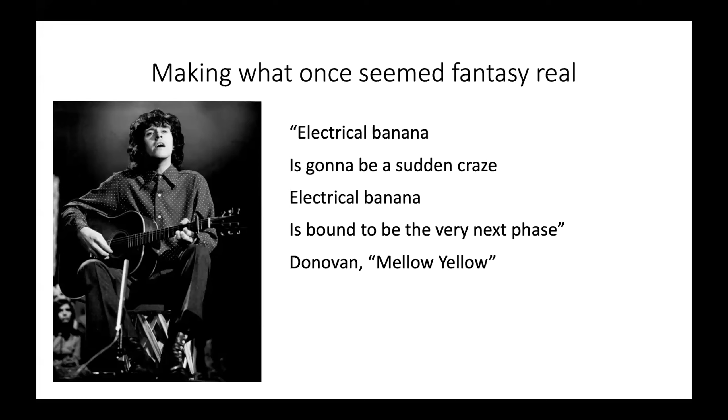However, going to 2021, it does look like we are indeed on our way to having electric aircraft being the very next phase. Much as we've seen with EVs—and by the way, when I say EVs, I mean electric ground transportation vehicles—we're seeing a lot that electric vehicles are going to revolutionize and help us transition to a cleaner economy from ground transportation.

There's a lot of attention also being paid to electric aircraft. In particular, air transportation is getting a lot of attention for its carbon footprint. As of 2018, it was estimated that air transportation made up a total of 2.4% of all global emissions, directly contributed. And the estimate is that if the air transportation sector continued its growth, this could triple by 2050. So with the focus on how we're going to clean up the air transportation sector, electric aircraft are getting much attention as a good short-term step towards cleaning up this sector of our economy.

I'm one of the principals of Aerial Innovation. We're a strategy consulting firm based here in Silicon Valley. We provide strategic advisory services to large enterprises, mostly in Japan, focused on advanced air mobility, or new air mobility—some people call it UAM. There's a little distinction in those terms, but we'll gloss over that for now.

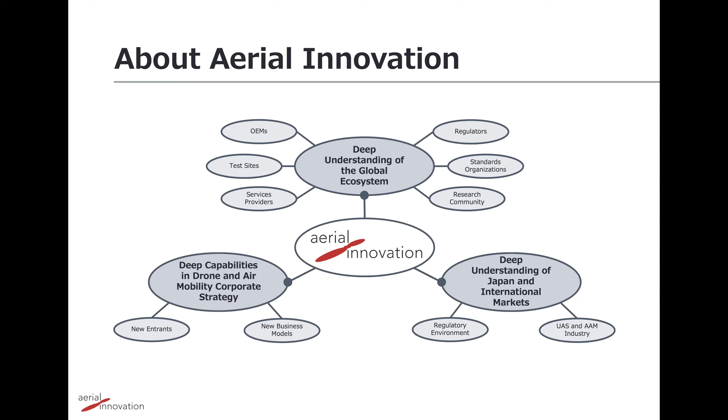We also work in the commercial drone space, or commercial UAS. So we typically advise companies that are not traditionally in aviation on how they can provide value in this new wave of innovation coming in new aviation, and how our clients can build enterprise scale businesses. Our principals have both been doing analysis and advisory in the technology sector for several decades.

Based on a few decades in the technology sector, we see new air mobility as the intersection of technologies that have been maturing for some time, but it's exciting to see them applied to a new sector. So I'll divide my introductory remarks into three categories: first, when will the future get here? A little about the ground infrastructure for electric aircraft, and then the business models that electric aircraft enable. So what are we talking about here?

To start off, electric aircraft are coming—there's no question about it. The future looks something like this illustration that I shamelessly borrowed from NASA. Just to set the stage, advanced air mobility, or AAM, covers everything that you see here.

In addition to small package and cargo delivery, which is envisioned to be done by unmanned aircraft—what some people call drones—and we're not really going to talk about that today, there are manned electric vertical takeoff and landing aircraft, or eVTOL aircraft. These are aircraft with pilots carrying passengers within cities, called UAM, or urban air mobility. You can think of these like helicopters, but with some important improvements.

And then there are also eCTOL, electric conventional takeoff and landing aircraft—aircraft that take off and land at airports, envisioned for transport between cities. In addition to what you don't see here, not part of the AAM vision, is work proceeding on electrification of larger aircraft, like the jet aircraft we're all familiar with to fly to Tokyo, for example. These are not typically included in the AAM vision, but it's an important parallel area.

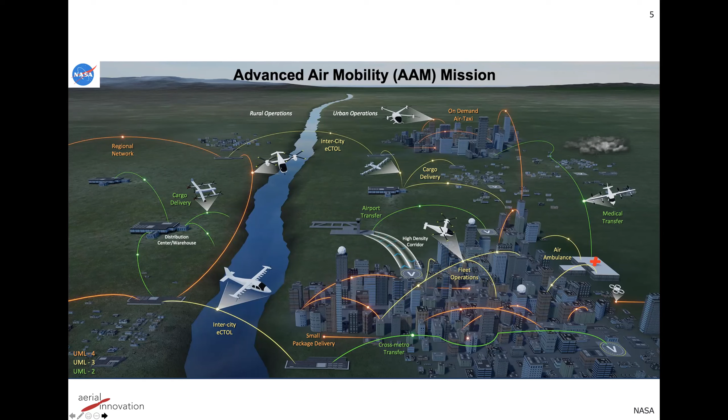Everything I've just mentioned is a vision that focuses on electric aircraft. So that's the future I'm talking about—so when does it get here? When can we have our future? The answer is: very soon, and also not for a while.

The very soon part is these advanced air mobility eVTOL aircraft in this first segment, 2 to 5 seat battery electric aircraft. The first of these are probably going to be certified by the FAA in 2 to 3 years from now—some are in certification right now. Commercial service we can probably expect to see in 2024 or 2025, with companies like Joby, Archer, Beta, Wisk, and others. There's also work going on to certify small propeller aircraft, 5 to 19 seat aircraft.

Some of them are retrofits of existing airframes. Some of them are all new aircraft. The retrofits include companies like magniX and Ampaire. The new designs include companies like Eviation, they have an aircraft called the Alice. Ampaire is also in there, Bye Aerospace, Magnus.

And then finally, here's a third category that is hydrogen fuel cells to power motors, this is a retrofit to existing regional jets. Here I'm referring specifically to a company called Universal Hydrogen, which is working on this kind of a concept. Super interesting stuff that they're doing.

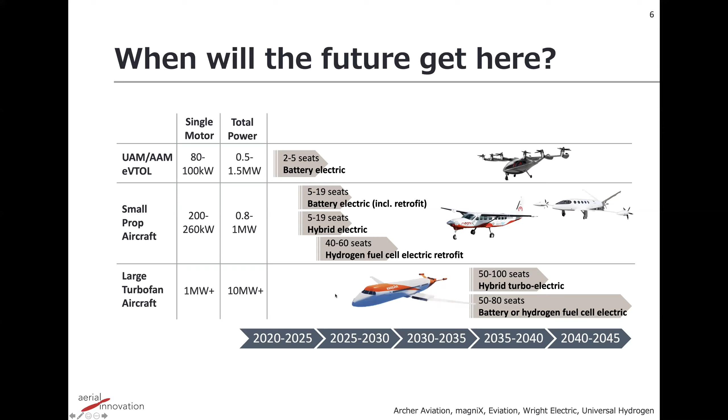In the 2040s is a time frame that we hear a lot. And the reason for that is, when you go from a couple hundred kilowatt sized electric machine or motor to a megawatt plus, and then the total power on the aircraft is 10 megawatts plus, 25 megawatts in some cases, you're talking about a big jump in the development that has to happen to get us from the left side of this all the way over to the 2035, 2040 timeframe.

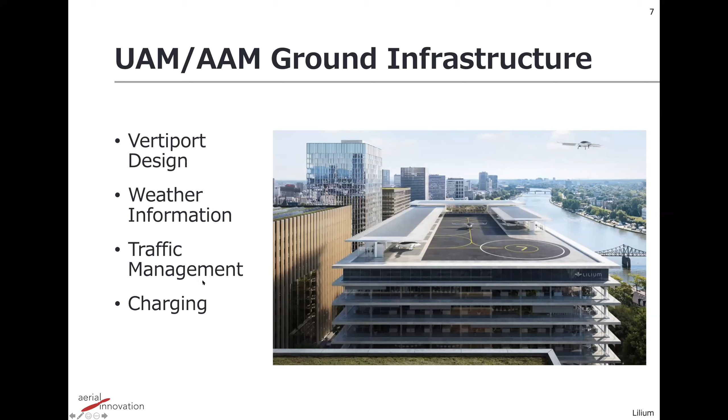Okay, so I'm not going to focus too much on the aircraft themselves. We have some really fantastic experts on the aircraft on our panel today. I'm going to talk more about the ground infrastructure. There are a few aspects that present challenges and, of course, some business opportunities for electric aviation: vertiport design, weather information, traffic management, charging. I'll hit each of these in turn.

So vertiport design. Can't we just land and take off with these new aircraft from existing heliports? The answer is yes, maybe for some, but probably not at scale. If we unpack that a little bit, existing heliports are designed for one basic configuration, the single rotor helicopter. The eVTOL aircraft, first of all, they have wings, many of them, so that they can use lift when they're in their cruise phase of flight and be much more power efficient.

Well, the eVTOL aircraft may need to minimize their time in hover. And so they may want to make a much more abrupt approach, not a right angle, but closer to a right angle in their approach to the heliport, or to what will come to be called vertiports.

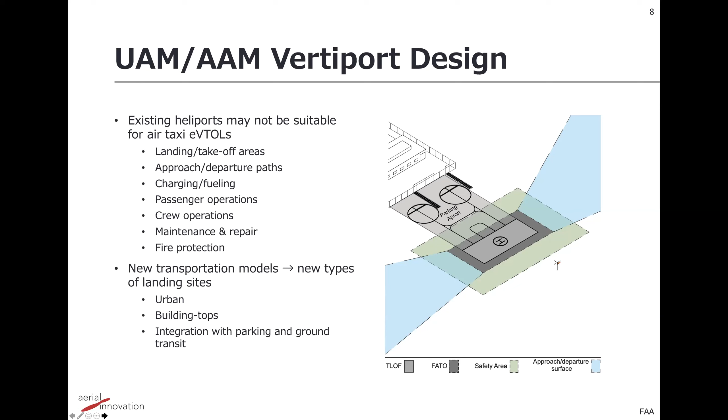So another area of ground infrastructure is weather information. Right now, today, we don't have really good sensing down at what weather people call the planetary boundary layer, so the under 1,000 feet that surrounds the Earth. Because we don't have a dense network of sensors, we can make educated guesses about what's going to be happening with the wind at a particular spot at a particular time, but if we don't have a dense sensing network, it's not very precise.

Smaller aircraft are more susceptible to winds, especially think about urban canyons, right? You've got small aircraft landing in urban areas, that urban wind canyon is going to be a big deal. And it's not only a safety issue, but there's also operational efficiency. If operators have better weather information, they can make better decisions about routing their aircraft, changing the routes at certain times of the day, changing their operations for the day.

But we're seeing some relief here. Some help is on the way.

There are new aviation weather paradigms emerging. New sensors that are not the typical aviation, extremely expensive, very finicky aviation weather sensors, but instead are something closer to an IoT sensor, or maybe something in between. So wind LiDAR is an example, 3D visualization of wind. And then using the data techniques that we use in other domains, applying statistical methods to the data, and being able to still rely on that data.

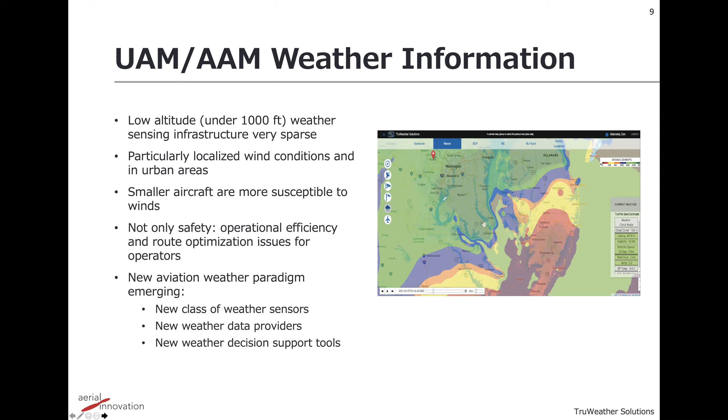The next area is traffic management. So today air traffic management is pilots talking to air traffic controllers, exchanging information and maintaining safe separation between aircraft by voice. That's probably not going to work, there just aren't enough air traffic controllers for thousands and thousands of vehicles in city centers. So AAM is envisioned to fly mostly in uncontrolled airspace, so it doesn't require air traffic control.

That's under typically about 1,500 feet. And then the aircraft organize themselves in corridors, or what's being called now an operating environment. The operators of the aircraft, think like the airlines, can share flight routes between themselves within the corridors, share information programmatically with automated systems, and maintain separation between the aircraft that way.

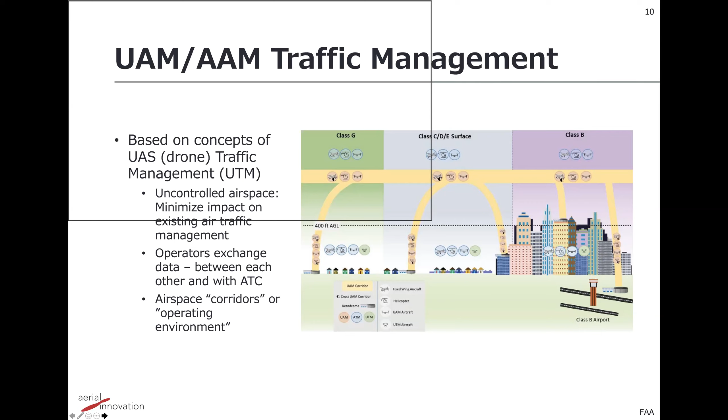This comes from a concept called UTM, or UAS traffic management. UAS means drones. It's developed at NASA and is being widely embraced around the world. This will eventually make its way into both UAM, urban air mobility, as well as sort of all air traffic control at some point.

And then the last thing on ground infrastructure is charging. There are going to be huge impacts on the electrical grid, not only the loads, but also fast charging. And the equipment itself—if you've ever been to a Tesla supercharger, there's a little building you may or may not have noticed that houses all of the conversion equipment. The equivalent of that is going to have to go on the vertiport someplace, up on top of a building. That's a challenge that needs to be solved.

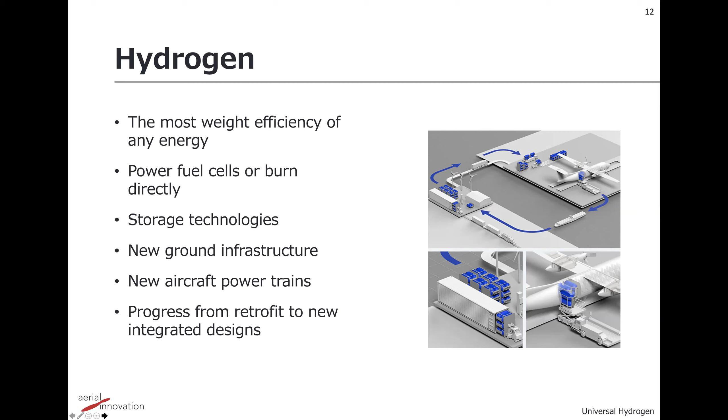I'll also mention hydrogen. Hydrogen is an excellent energy source. There are some technology challenges, right—storage technologies, ground infrastructure. I mentioned earlier a company called Universal Hydrogen. This is their concept for kind of creating Nespresso pods for aircraft with hydrogen. It's a very clever idea, and I encourage you to look into that more.

So these electric aircraft make some new business models possible. They don't need a runway. They're kind of like a helicopter, but they're fast, they're quiet, and they're expected to have much lower operating costs than conventional helicopters. So you can combine these with some other innovations we've seen recently and get powerful demand aggregation, bringing lots of riders together to ride on these vehicles.

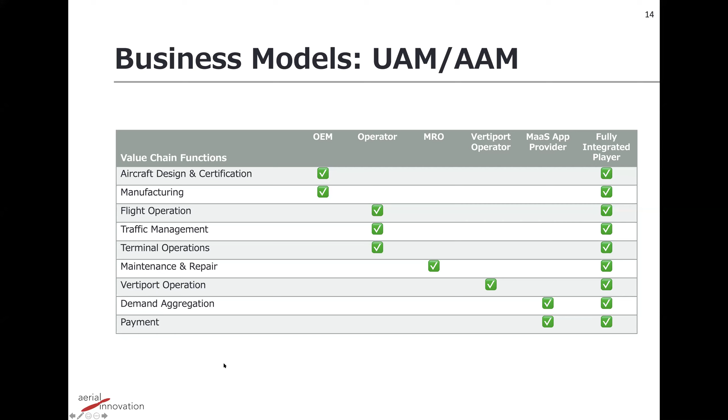Another opportunity that emerges with electric aircraft is different scenarios for business models in aviation. Right now in aviation, if you look at these rows as the value chain, a lot of it's broken up between different parties. This is an oversimplification, but new players like Joby and Lilium and others see opportunities to vertically integrate, to capture efficiencies like lower maintenance and operating costs for themselves. That's what I think we usually call disruption.

And that's the slide that image is supposed to appear on, in the orientation it's supposed to appear.

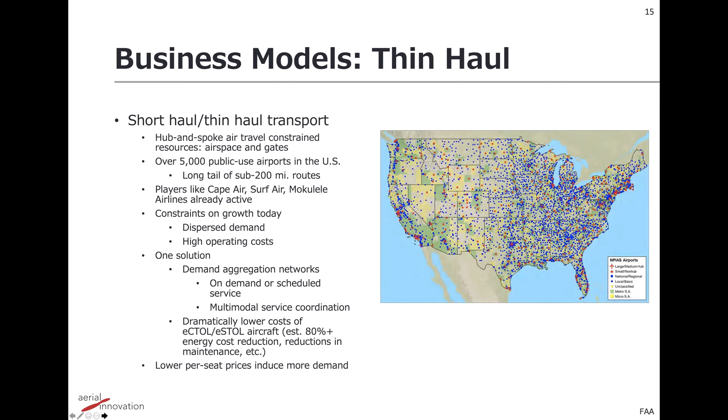To get away from AAM a little bit, just one last comment on something called thin haul or short haul thin haul, using conventional takeoff and landing aircraft, so electric fixed wing aircraft using runways, applying some of the innovations we've seen in urban air mobility or advanced air mobility to those aircraft. This creates an opportunity to use smaller existing airports. For example, here in the Bay Area, San Carlos Airport has providers in this space today, although not using electric aircraft quite yet. You can book a seat from San Carlos to, say, Reno or Tahoe. The original research on this kind of thin haul transport came out of the same NASA research project that eventually spawned UAM, the urban air mobility we're seeing today. Some of the players here are folks like Cape Air and Surf Air, and we can expect to see more of this as electrification of these aircraft makes their business case even better. So that's a quick overview.

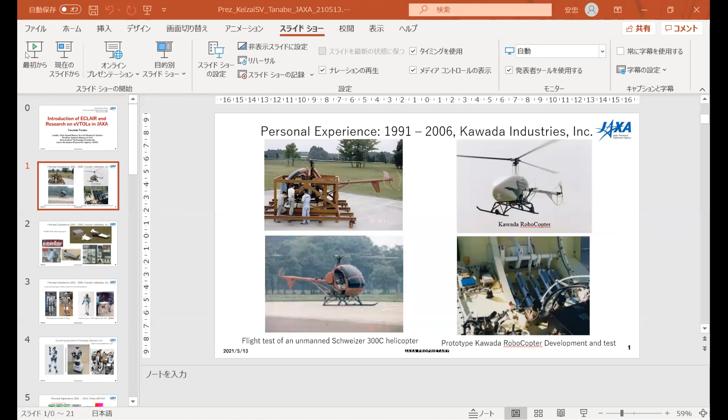I'm Yasutada Tanabe, I'm working for JAXA. I want to start with some background talk about myself and my research on eVTOLs, and I want to make an introduction of ECLAIR, a consortium in JAXA.

My personal experience: before I joined JAXA 15 years ago, I was working for Kawada Industries for another 15 years. During my stay at Kawada Industries, I was engaged in developing the unmanned helicopter. We converted the manned helicopter Schweizer 300C into an unmanned version and flew it unmanned. I think in that era it was very pioneering work. Finally, this work was referenced by the VTUAV by the US Navy, which right now converts much bigger helicopters into unmanned versions for observation platforms. We also developed an unmanned version based on the Schweizer 300A.

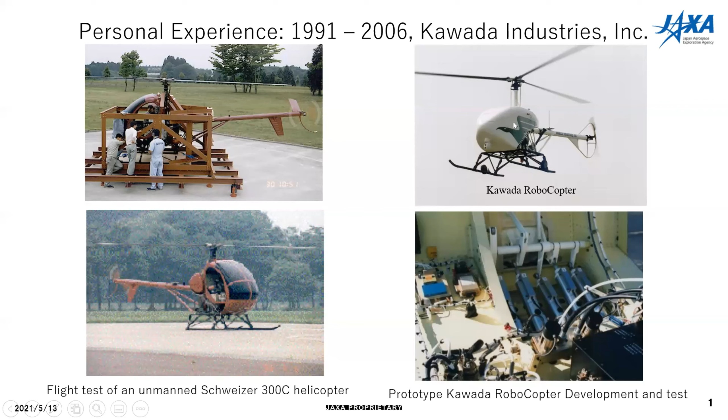We developed the actuators and flight controls, and autonomously flew this aircraft. I also engaged in development of an unmanned small miniature air vehicle. It's fixed wing, but we fly it automatically. This is a project together with Hitachi, the Hitachi Kawada micro air vehicle. Finally, it was used by the Japanese defense, the SAT UAV used it. The production version was 5 kilograms and carried an infrared camera.

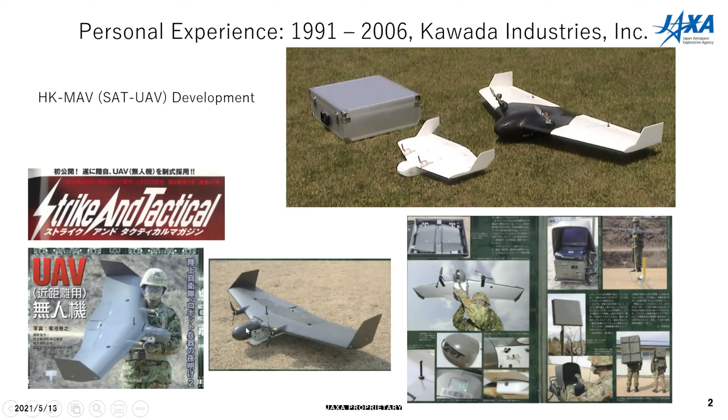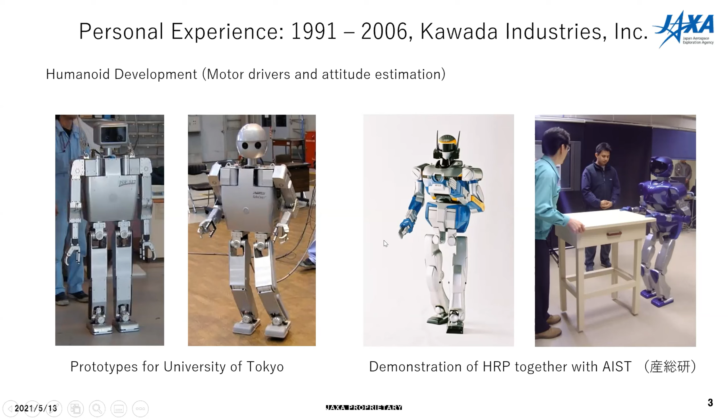I also engaged in some motor driver and attitude estimation work for humanoid robots. First we made prototypes for the University of Tokyo of this kind, and then we got engaged in a national project, the HRP project, humanoid robot project, together with AIST, Sansoken. This robot is designed to work together with humans. We made a lot of demonstrations for that, and finally Kawada Industries set up Kawada Robotics. If you're interested, you can check their website. Right now they're selling a two-hand robot that can stand on the production line and use two hands to assemble very complicated products. Here the previous premier Abe was visiting this factory with this NEXTAGE robot.

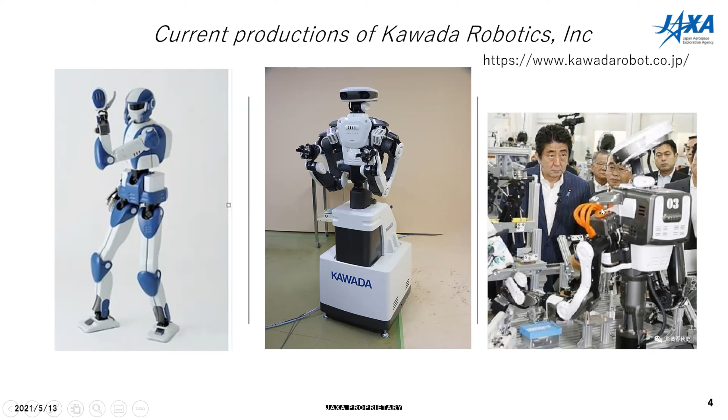When I joined JAXA in 2006, my main work is shown in this slide. Firstly, my major work is actually doing analysis for rotary wings. We can handle very complicated helicopter shapes using very sophisticated numerical methods, and analyze the elastic deformation and vibrations of the blade together with the aerodynamics. Finally, we can predict the noise at any place.

Also, right now my major work is developing a high-speed rotorcraft. This one is a compound helicopter. During the flight, we use propellers for propulsion, so the helicopter can keep level in attitude and has very low drag. Our goal is to achieve twice the speed of the conventional helicopter. Also, using some government funds, I've engaged in developing some variable pitch controlled drones.

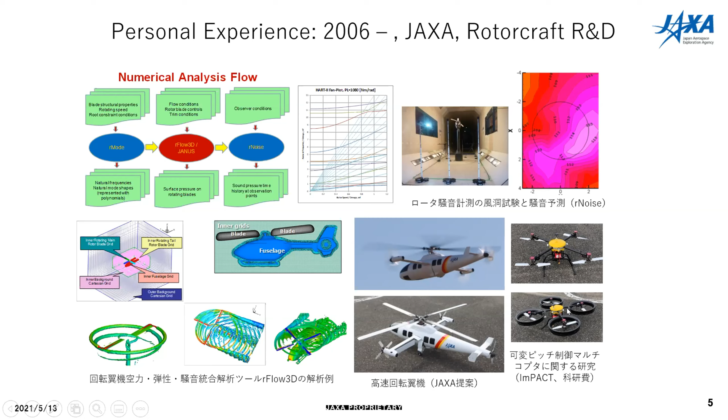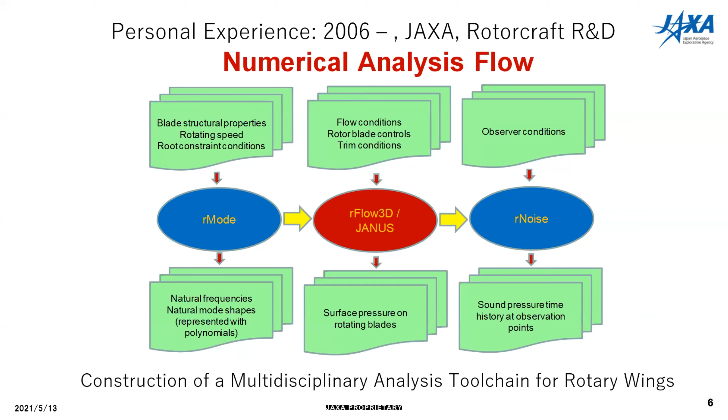And this is some detailed show of the analysis flows. We call it the rFlow3D analysis toolchain. Right now, there are over 10 universities who have interest in the rotorcraft research using our software. And also we are licensed to companies and some research institutes. So we just work like a basic background for the Japanese research for the rotorcraft.

This is some example of the analysis, and this is the example for the vibration analysis for the natural frequencies. You can avoid a resonation at some certain operational speed. This is prediction of the noise on ground. We are also carrying out some measurement in the JAXA's wind tunnel.

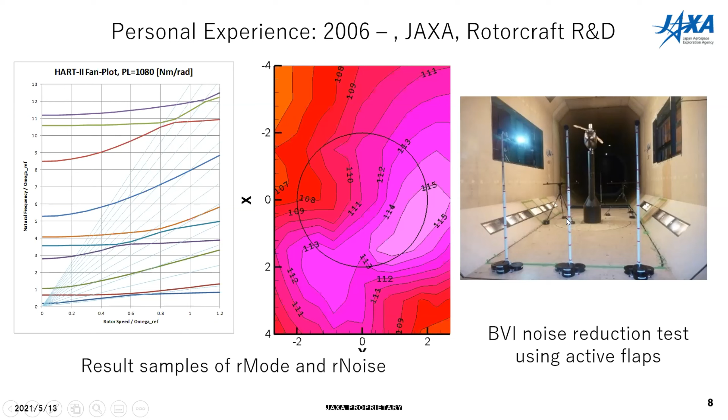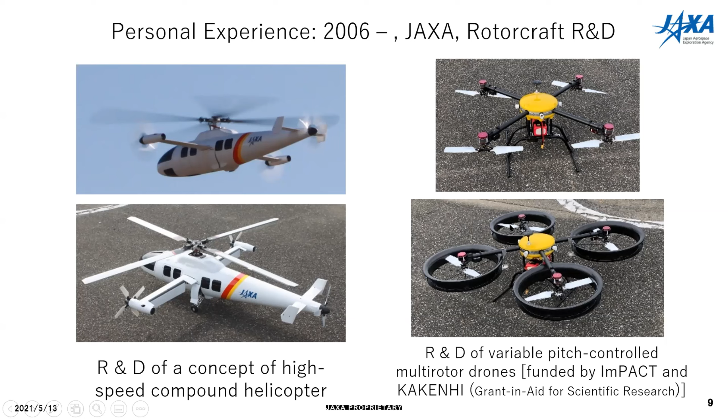And this one is a concept of the high-speed compound helicopter, and this one for the variable pitch controlled multi-rotor drones. It's funded by the Japanese government, the ImPACT program, and right now we are using the KAKENHI, the grant-in-aid for scientific research, for doing this kind of research. And with that, we can analyze very complicated flow fields around the multiple rotors.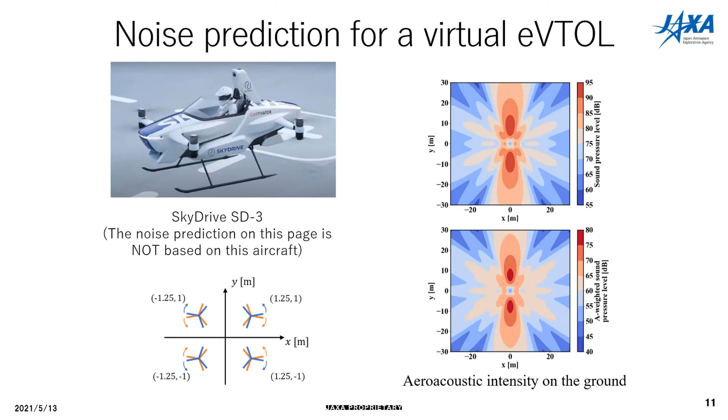Okay, here I want to make some introduction about what we are doing in Japan, in JAXA, about aircraft electrification. The following slides are provided by Dr. Akira Nishizawa. He is the leader for this program in JAXA. I want to make the presentation instead of him.

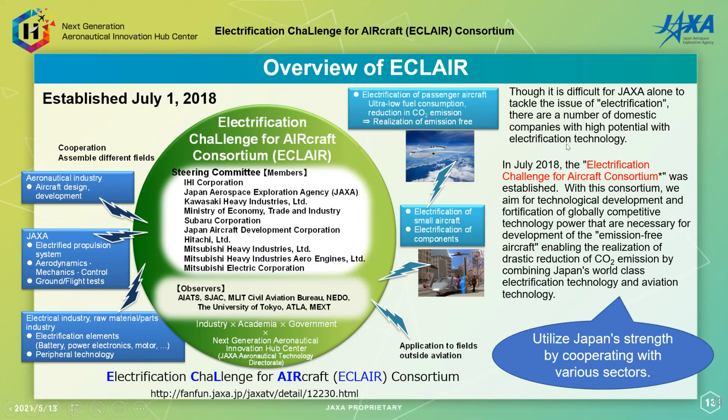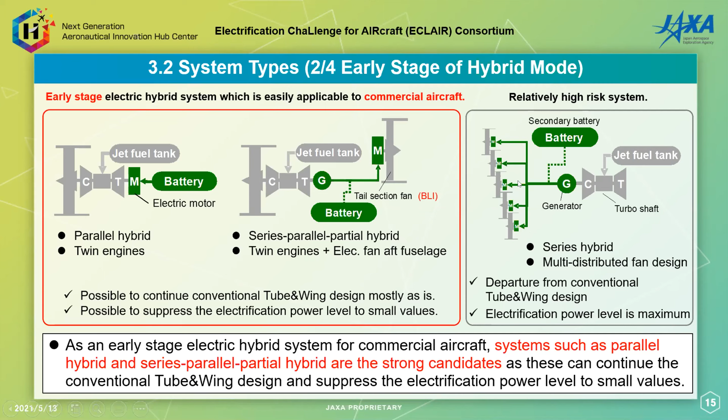In the early stage of hybrid mode, the battery supports the electric motor generated by jet fuel via the engine, so the major driver of propulsion is also provided by the turbine itself. Gradually, we can have a generator driving a main engine that generates electric power and provides it to other motors, to other propulsion systems driven by motors. Finally, the ideal system has a generator only that does not directly provide propulsion, with distributed propulsion systems driven entirely by motors.

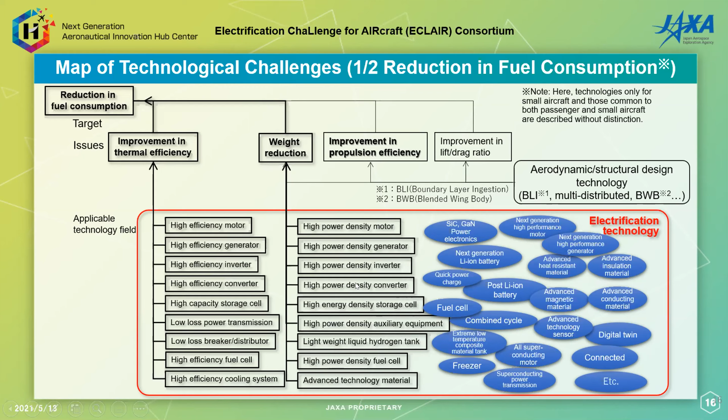So there are a lot of technical challenges to reduce fuel consumption, involving high efficiency motors, high power density motors, generators, inverters, and other electrical components. These are the important technical issues.

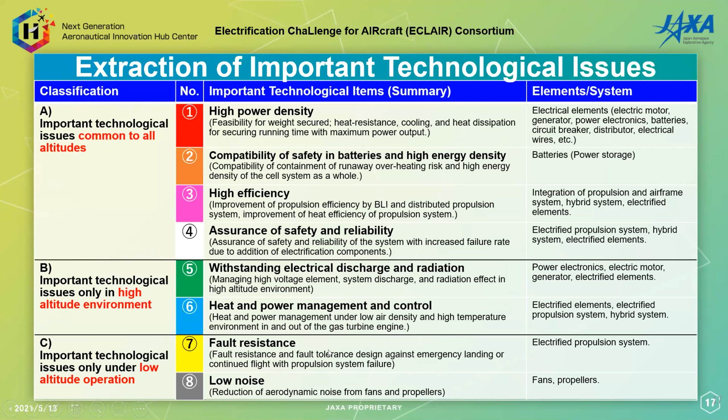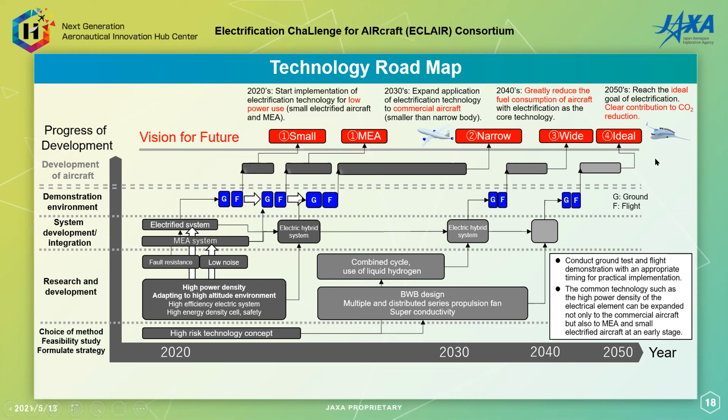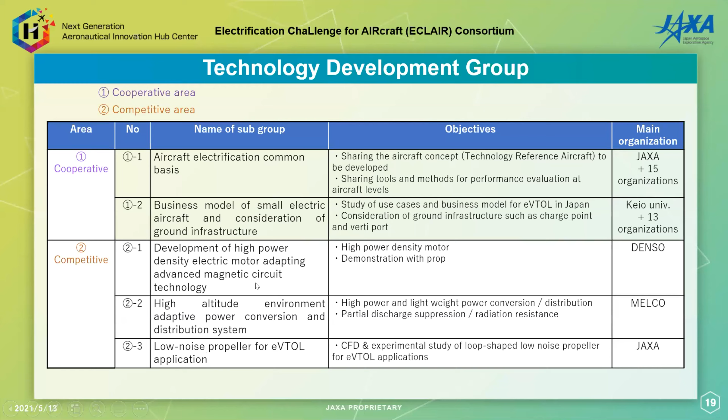As a summary for ECLAIR, electrification technology for aircraft is key to achieving dramatic reduction of CO2 emissions from passenger aircraft, and innovative changes to everyday transportation service for small aircraft. Through open innovation, by strengthening cooperation with different sectors, we aim for expanding the aviation industry by applying electrification technology, in which Japan has a technological advantage, to the aviation field.

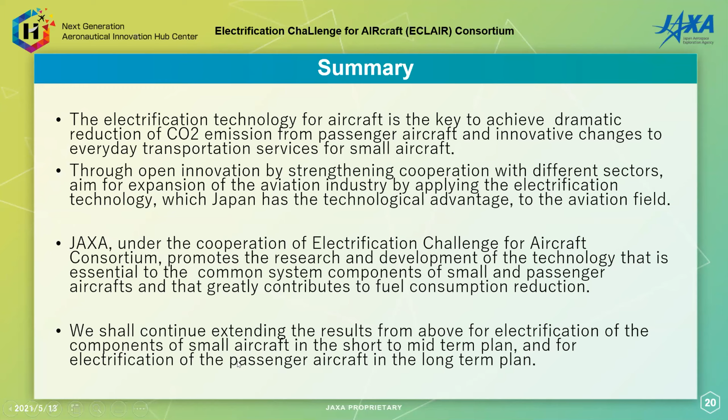JAXA, under the cooperation of Electrification Challenge for Aircraft Consortium, promotes research and development of technology essential to the common system components of small and passenger aircraft, greatly contributing to fuel consumption reduction. We shall continue expanding these results for electrification of small aircraft components in the short to mid-term plan, and for electrification of passenger aircraft in the long-term plan. That's all for my introduction. Thank you.

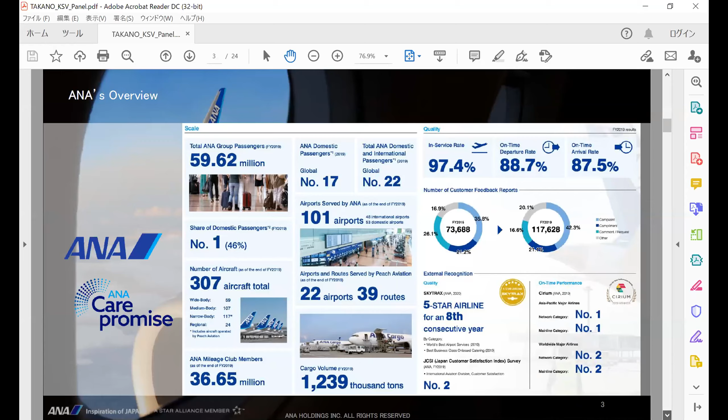Next, I will try to introduce what ANA is like. I hope everyone knows about ANA as an airline, and a brief history about ANA. Actually, it started as the Nippon Helicopter Company, which dealt with helicopters, vertical takeoff and landing aircraft.

At the start, and now we are dealing with the eVTOL, electric vertical takeoff and landing aircraft, so there is some familiarity. The other thing I wish to touch upon is we are not only dealing with large airplanes, we have just launched the drone air mobility project, in 2016, which I'm now working for.

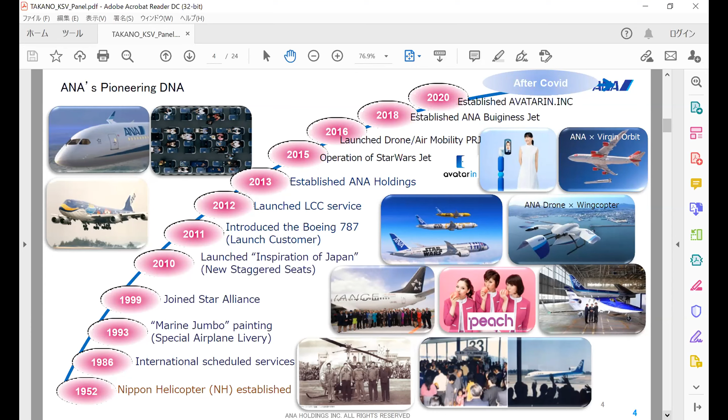We have also established avatarin Inc., as well as we are trying to work with Virgin Orbit to launch spacecraft. So we are a very innovative-minded company, and in that context, we are trying to launch advanced air mobility services in Japan.

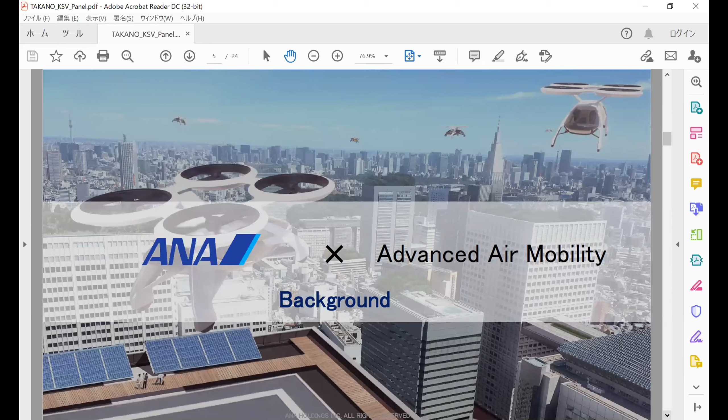So next, I will try to touch upon briefly the background. Probably you have listened to Mr. Borda about what AAM is and what it looks like.

Actually, it started with the concept of urban air mobility, proposed in 2016 by Uber. It's a kind of very sensational document for us, and it helped us understand what the future of air mobility will look like.

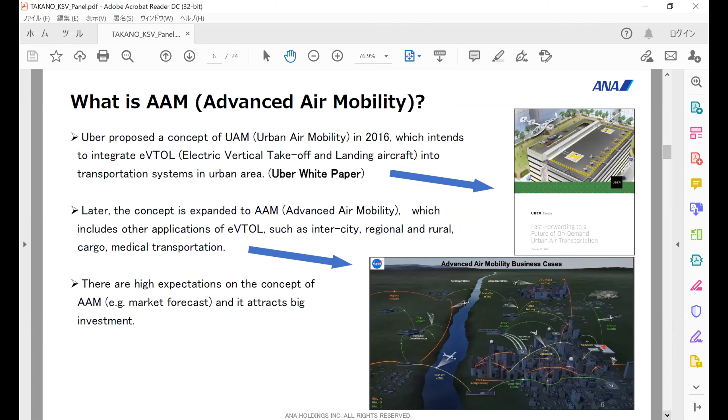So, as an operator, what could the benefit of the electric vertical takeoff and landing aircraft be? As already introduced, it has less complexity and that's the best part compared with the conventional VTOL, the helicopter.

Actually, the helicopter is a very beautiful craft, but it requires very huge rotors, a main rotor and tail rotor, which require a very complicated mechanism, like gears to connect the engine and rotors, and a shaft to connect the engine and tail rotor. Also, a single main rotor or dual main rotors provide all the lift for the aircraft, which means there is a very important single point of failure.

But the multi-rotor eVTOL has no single point of failure. That means we can easily achieve a higher level of safety with the introduction of the eVTOL compared with the helicopter.

Also, less complexity and fewer parts means lower cost for maintenance and lower cost for operation as well. Also, probably with the introduction of automation technologies, the eVTOL will be much easier to fly than helicopters. And also, the noise and CO2 emissions - it's a very environmentally friendly craft to fly.

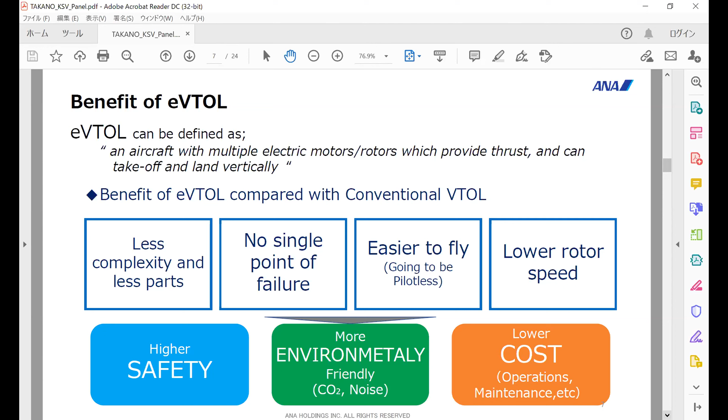And we start with the low frequencies and a limited number of routes, with the current regulatory and current ATM framework with a small amount of adjustment to them. But the final goal is the high density and high complexity operation, which will accommodate thousands of simultaneous operations in the megacity area.

And so to achieve that, there are many technological challenges, many regulatory challenges, and many infrastructure challenges. But it's a kind of process where while technology is developed, we are preparing for the installation of the new technologies in society. And so it's a very new and innovative approach in civil aviation, because previously, or currently, what we are doing is the introduction of very proven technology into aircraft and air traffic management. But we are planning to introduce very challenging technological development and very innovative framework changes in the future.

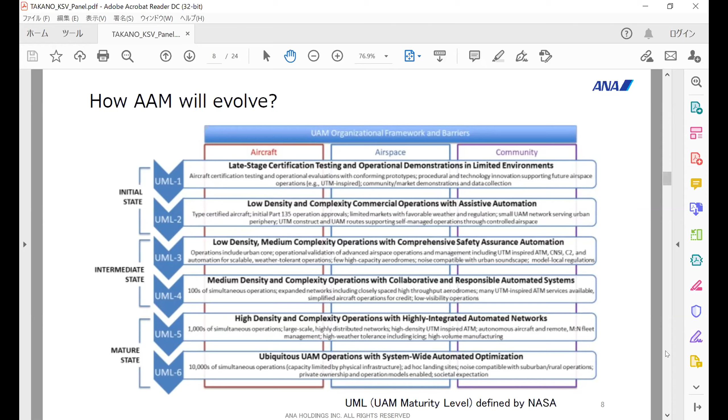Okay, next slide. So let me go through what ANA is thinking about the development of air mobility in Japan. First, advanced air mobility is expected to have a very big market. Even in Japan, there is one forecast that the market for AAM will be 25 billion yen in Japan in 2040. That's a big number.

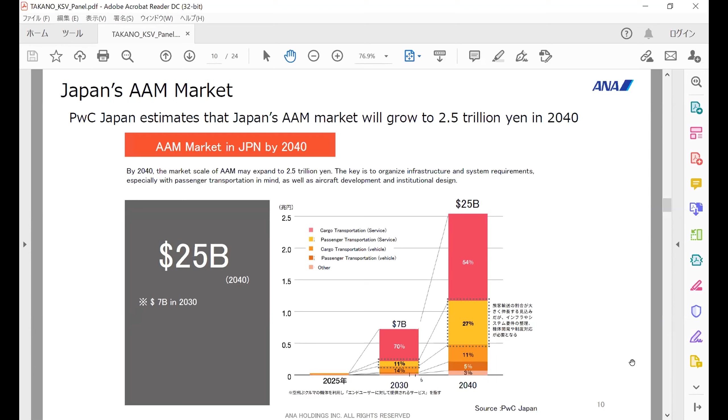And we are trying to start our involvement in AAM from the airport shuttle service. Airport is a very big base for ANA, and it's natural for us to start the service with airport shuttle. We are planning to start the airport shuttle services in the Kansai area on the occasion of the Osaka Expo 2025, like Kansai Airport to the site of the Expo, carrying passengers.

And then we are going to expand our services to Tokyo, Nagoya, and Okinawa. Then we will be entering into routes which are not relevant to the airport, like intercity transport services, and then on-demand air taxi and so on. But the speed of progress will be very fast, and we are expecting to have on-demand air taxi services soon after 2030.

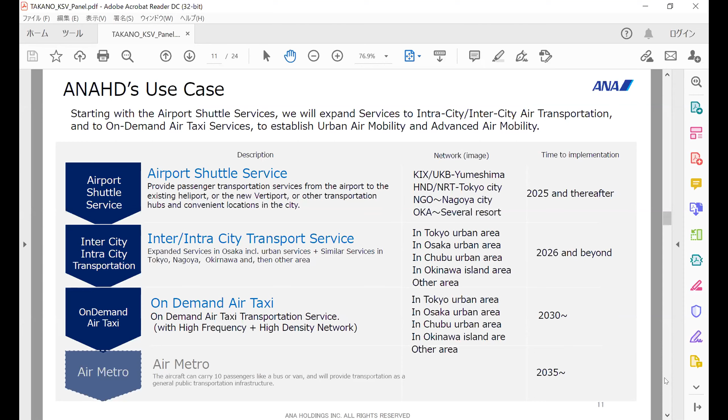And it's a potential network for the whole region. I referred to the airport shuttle. For the Kansai area, Expo 2025, we are trying to start from Kansai Airport, Kobe Airport, to the site of the Expo, and connect them with Osaka downtown transport. Then similar things will be happening in Nagoya, Tokyo, and Okinawa.

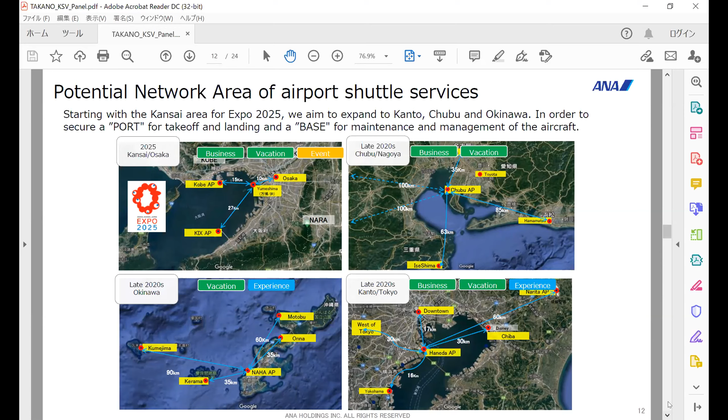And probably everyone is interested in what the Tokyo service will look like. Actually, we are trying to find out potential vertiport places in the Greater Tokyo area, like Haneda, Narita, Chiba Prefecture, Kanagawa Prefecture, and downtown Tokyo. And they are very promising in terms of traffic demand.

And this is the time frame for our work to be done. We are now in the phase of preparatory work. We are planning to launch familiarization services in 2024, and then go into the Osaka Expo to do commercial passenger services at some level of scale. And then we will expand the operational area for more mature services.

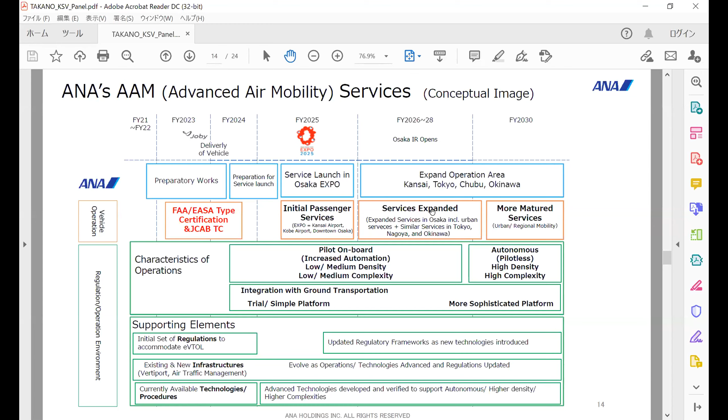From the government side, there is a big commitment by the Japanese government to introduce advanced air mobility in Japan. There was a cabinet decision made in 2018 to launch a public-private council. Also, those cabinet decisions referred to the year 2023 as the starting point for eVTOL commercial services, as well as 2025 passenger services at the Osaka Expo. So there is a big commitment made by the Japanese government for the early introduction of urban air mobility, or advanced air mobility, in Japan.

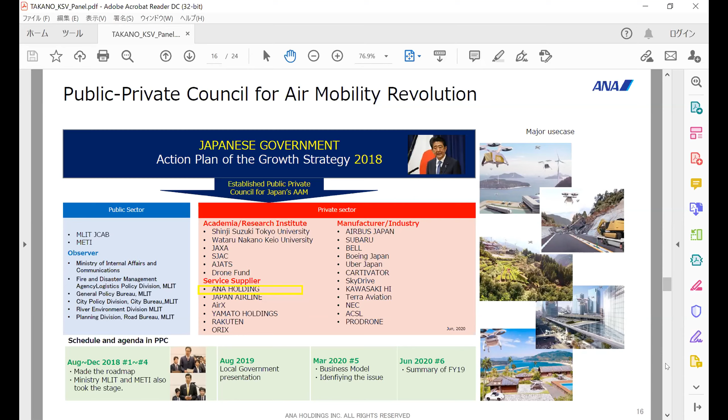And so in 2018, the Public-Private Council for the Air Mobility Revolution was established, and they released an action plan, a roadmap for advanced air mobility, which is like this. It refers to the plan for the introduction of air mobility in Japan, and also what government should do regarding the introduction of new legal and regulatory frameworks to accommodate new types of operations and new types of vehicles, as well as what kind of technological development is necessary.

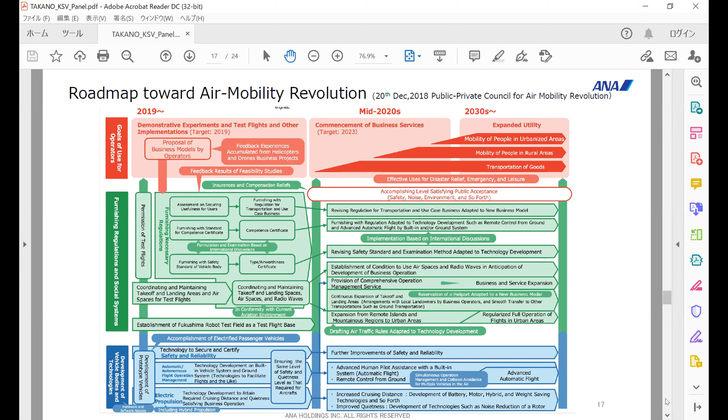In the course of discussion in the Public-Private Council, there are specific use cases dealt with by the council, proposed by stakeholders in the private sector. Those are: 2023 start of initial operation, 2025 start of commercialization of transportation at the occasion of the Osaka Expo, as I told you, and from 2026 onward, expand transportation service to other areas, and also medical and emergency services, and so on. So there are many stakeholders interested in the introduction of AAM in Japan, and the government is trying to materialize those interests.

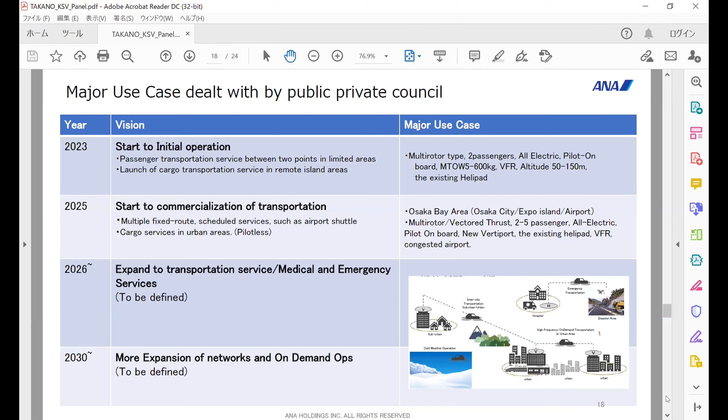Recent work of the Public-Private Council: there are working groups dealing with specific tasks like certification, pilot licensing, and flight operations. Each working group has identified issues to be addressed under the current framework, including regulations and procedures related to ATM. From this year, they continue to think about how those issues can be addressed, aiming for results in time for the initial AAM services in Japan in 2023.

The other thing I wish to mention is the Osaka Expo. There's a master plan released by the Osaka Expo Committee in December last year, which has already incorporated the vertiport for eVTOL services. So they are ready to accept AAM traffic in year 2025.

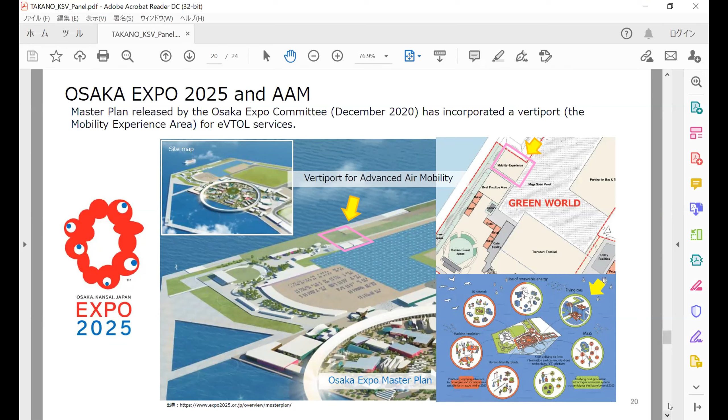Also, there are local governments with interest in the introduction of AAM in their region, like Osaka, Fukushima, Tokyo, and Mie, and others. So it's a very good foundation for the social acceptance of AAM in Japan.

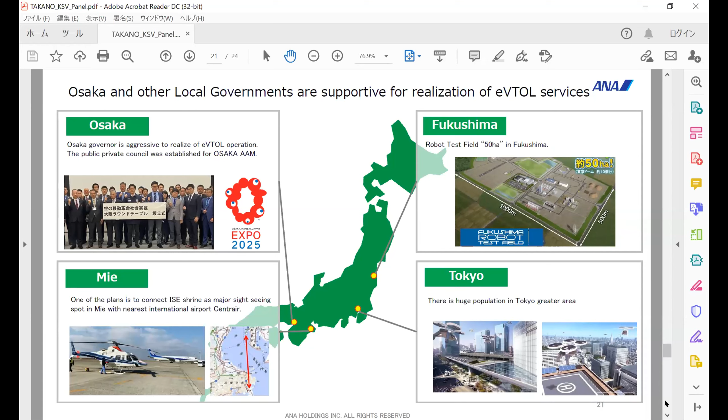Now, barriers and challenges. In the short term, to introduce airport shuttle services, there are several barriers and challenges, including necessary regulatory changes and requirements, certification, licensing, and air operator certificate, and so on. Also, we need to secure the vertiport. Especially, it is important to have flexible access to congested airports like Kansai and Haneda, and also access to existing or new heliports in big cities like Osaka and Tokyo.

Also, it should be safe and reliable. Reliability is very important for passengers going to and from the airport. If the flight is cancelled due to bad weather, it will cause a very big inconvenience for the air traveler. So operation in bad weather is a very important part of the short-term challenge. Also, public acceptance and scalability will be key issues for the initial services.

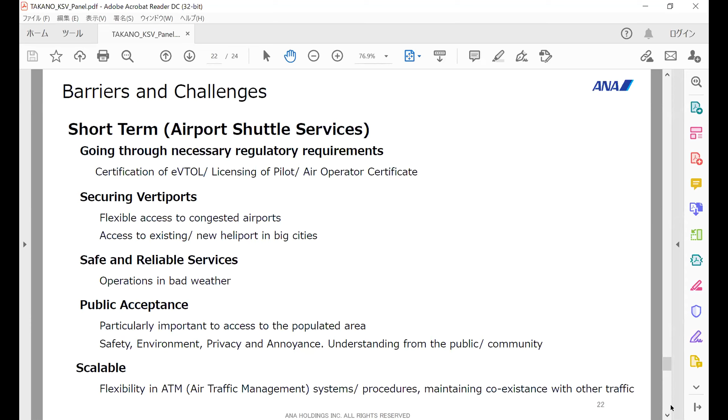In the long term, to achieve the goal of high density, high complexity, fully automated autonomous operations, there is a need for an updated regulatory framework in parallel with technological development. Also, there should be an innovative concept in ATM, which was partly briefly introduced by Fred-san. And it should be safe and reliable as well.

The new challenge will be security. There will be extensive use of network technologies if we are going to have fully automated and autonomous operation, and cybersecurity will be key. The other thing is, if we are going to introduce pilotless operation, is it okay for the passengers? The security of the operation should be achieved by some means. So the security challenges and public acceptance challenges for fully automated flight.